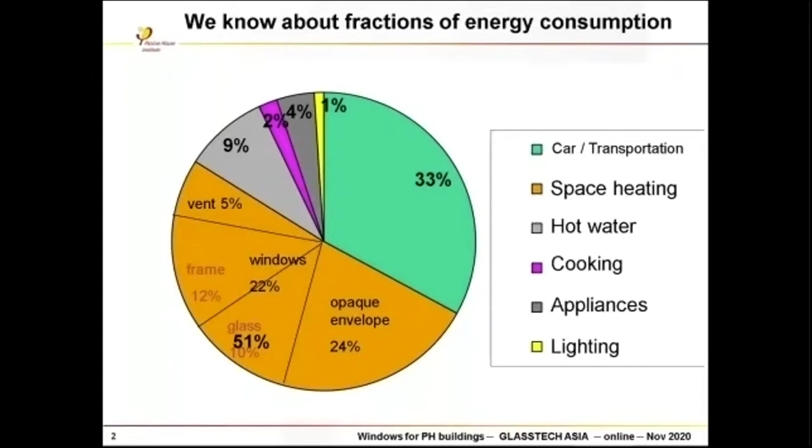As you all know, the fraction of energy consumption of buildings is quite high with respect to other energy consuming sectors in the world. Here the orange part of the circle is about 50%, and windows from the building envelope need about 22% of that. So you see it's very important to go for good performance windows, well insulated with glass and well insulated frames. I would like to go into more detail now.

The other point is about comfort. If you want good thermal comfort inside your building, your opaque parts, but most importantly, transparent parts like windows and glasses, should be well insulated. Therefore we need 3-pane glazing so that the minimum surface temperature at the glass is, in this example, better than about 17 degrees centigrade, even if it's very cold outside.

In old, conventional buildings, this glass and frame insulation is not so good, and therefore you need a radiator just beneath the window.

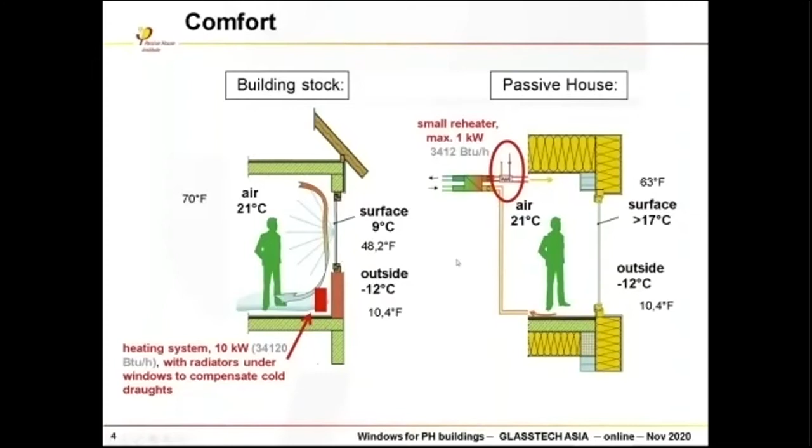If you go into the requirements in detail, for very cold cities with cold winter temperatures, for example Moscow, you have to go down to about 0.6 watt per square meter Kelvin U value. Otherwise thermal comfort will not be good enough for windows.

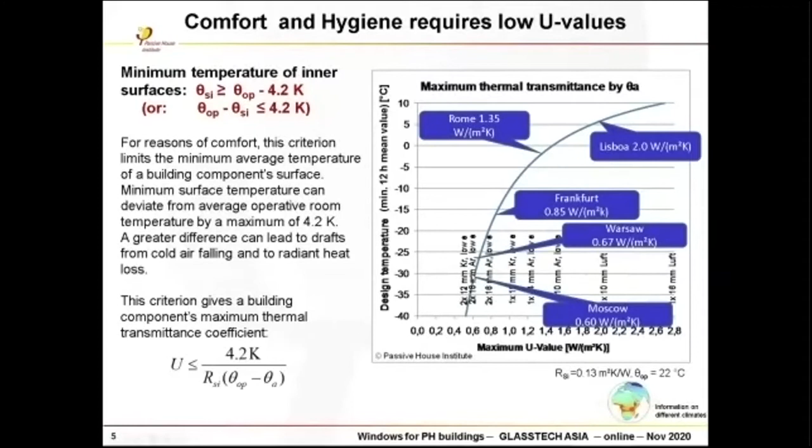The same is true for hygiene. If the surface temperature is too cold, you will probably get condensation inside the glass and frame, and this is not healthy - it may damage and lead to mold growth and so on. Please help avoid it wherever you can.

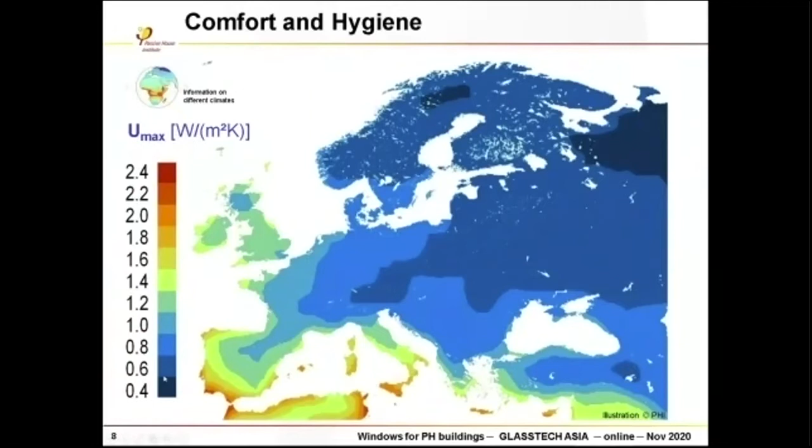From these thoughts you can set up this map, for example for Central Europe and Eastern Europe. You see that the colder the area, the lower the U value you need.

The next point is the gap between glass and frame, the connection at the edge of the glass. Normally a spacer is installed, and if the spacer is not good enough and the glazing rebate is not deep enough, you will have a thermal bridge there, as you can see here.

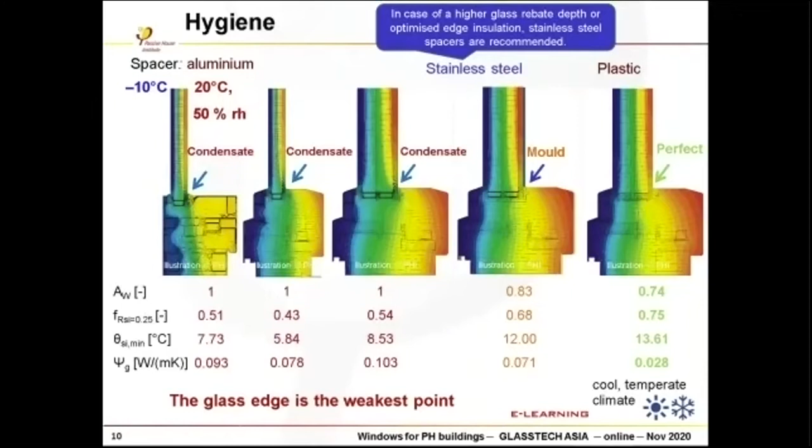If you don't do it well enough, you will have condensate or even mold growth. Only if you go for a very good glazing edge will you get low values and very good performance with respect to hygiene and comfort.

From that you see this map once more. Depending on the winter temperature, you can check the overall window U value you should go for: 0.4 for very cold regions, 0.6 for maybe Sweden, 0.85 for Central Europe, and a bit more relaxed for Spain and so on. In South Italy, you only need a 1.3 U value.

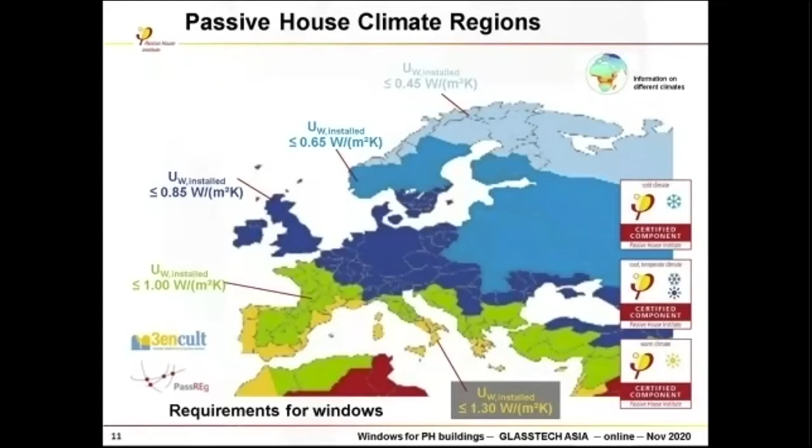This is the goal - to see what quality we should require and where to go. For each region we have now set up a certificate requirement. You see this for the very cold and for the warmer climates, you just get a certificate with different marks here.

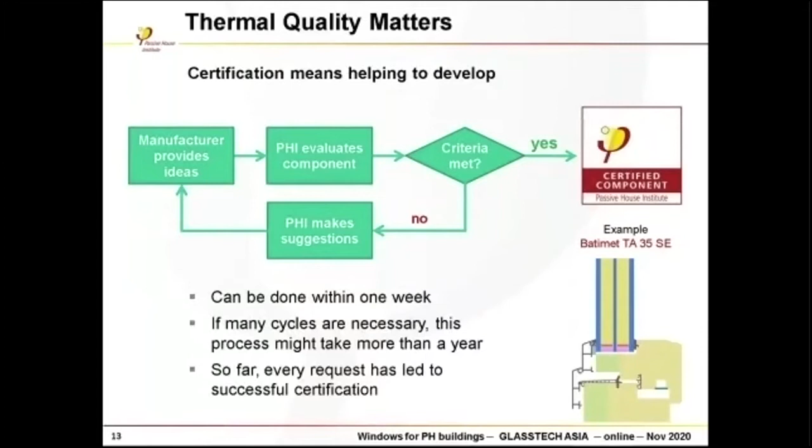What we do with certification, in principle, is quite simple. We check your product, your window, and look if the criteria are met, by looking for the thermal flux through this part. If our criteria are met, we can give a certificate. If not, we make suggestions how to get the window better insulation and lower thermal bridges, and then you can go for the next turn for the certificate.

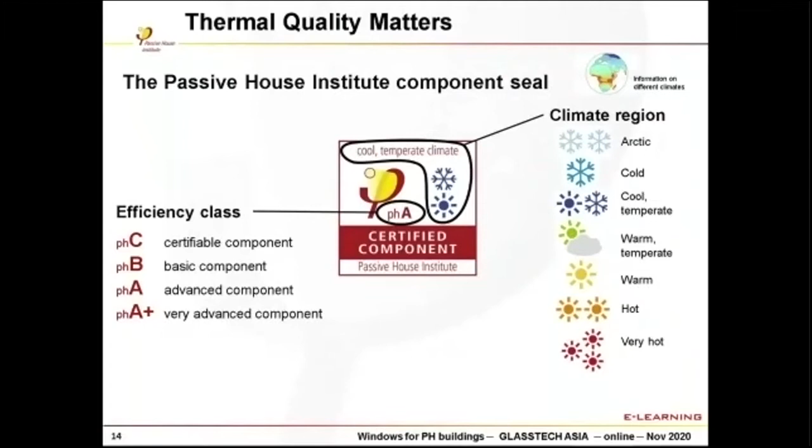Here again you see the certificate. It has three parts: one is the climate, here the other is the efficiency class, and here you see the regions - Arctic, cold, cool temperate, and so on - denominated on the certificate and on the label. On the certificate in total you get more information about the frame, frame quality, and the producer, and what glass you should use for this and that.

So architects and engineers can have a closer look at the quality and make their decision what product to choose. You can find all these certificates on our website, passivehouse.com - please look at the component database link, and there you will find all these products listed.

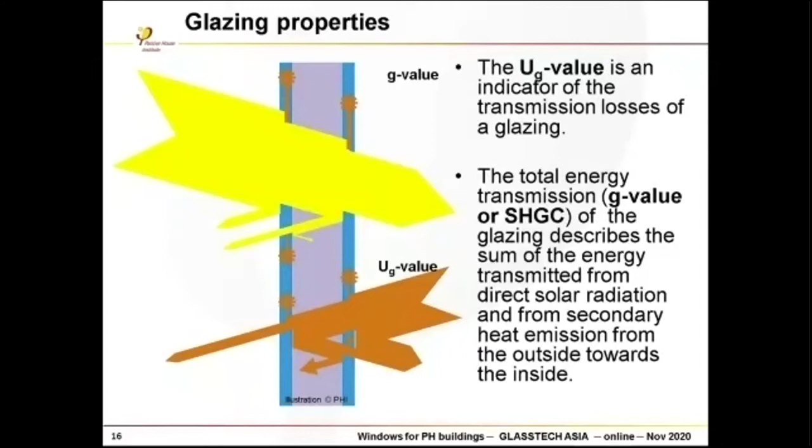Next point is glazing. We get solar radiation from outside through the glazing to the room, and the solar throughput is described by the G value - the higher the G value, the better. Second, in wintertime especially, we have thermal losses, energy going from inside to outside, and the U value describes these thermal losses. So we have to set up a very good ratio: the lowest U value and the highest G value possible, to get a good performance window.

The basic quality is maintained by insulation, having several window panes. A good compromise for most climatic regions is a 3-pane glazing with 2 coatings, on surface number 2 and number 5, with a noble gas filling inside, and a very well designed glazing rebate. For very cold regions you may go for a 4-pane glazing, but this is just for Russia and similar climates.

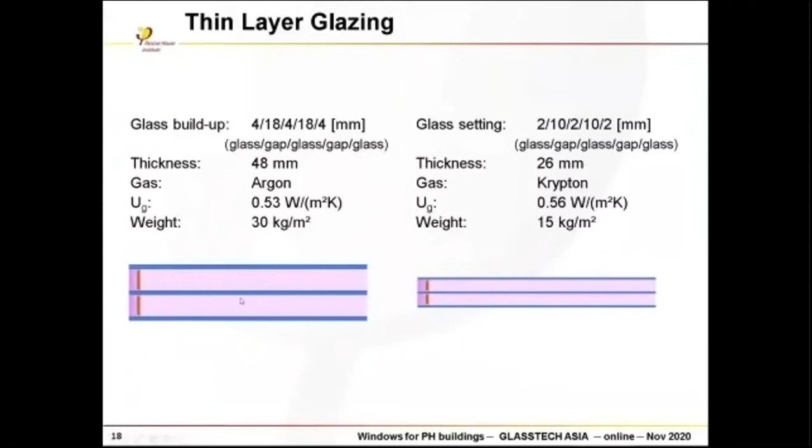Another point: if you want very slim and lightweight glazing, you can do this - it's a newer development. But please note, if you go for very small gaps, you need krypton instead of argon. Argon with a wider gap is a cost-effective solution, but it's a little more weight.

The other point is vacuum glazing. This is a promising development in recent years, but please check the rebate - the edge of the glass has a very large thermal bridge, and therefore, as you see on the right-hand side, you have to have a special frame to get the heat losses at the glass edge as low as possible.

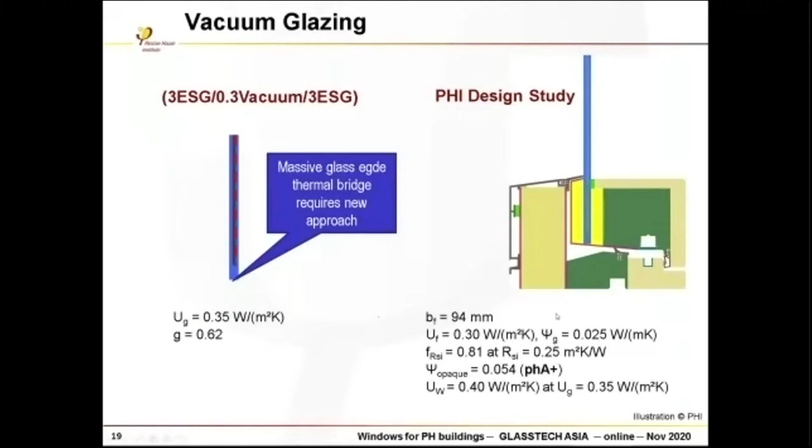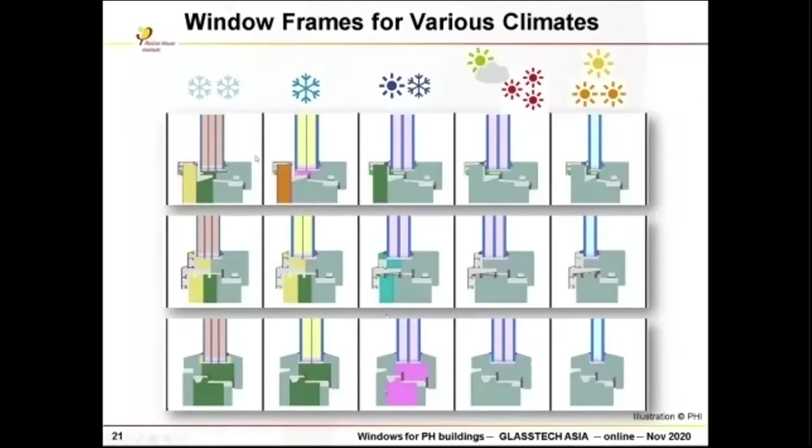If you put this all together, here's an overview of three types of frames. For a very cold climate versus a warmer climate - here you have almost no insulation, only just wood. But for the colder climate, you have to check and go for better insulation, an extra shell, so that your window frame U value is as good as possible.

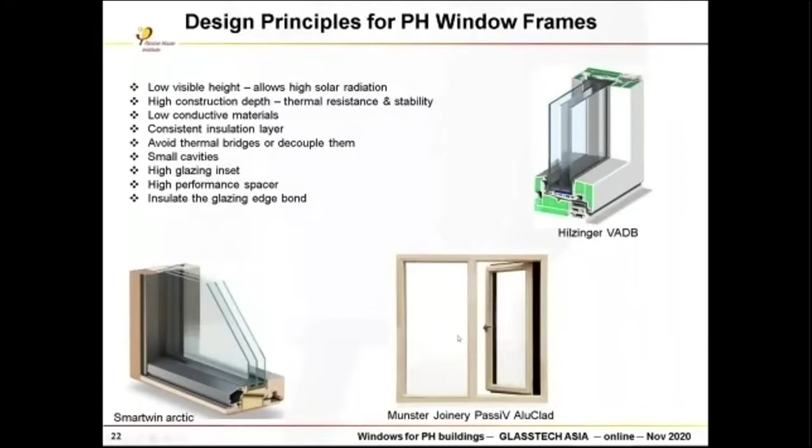As a summary, the two window frames you see here - the most slim width at the side of the window frame is desirable, so that the solar throughput through the window is as good as possible always.

The frame has to be well insulated, and the connection between the sliding frame and the rest of the window has to be quite good here. The manufacturer you can check on the certificate in our component database.

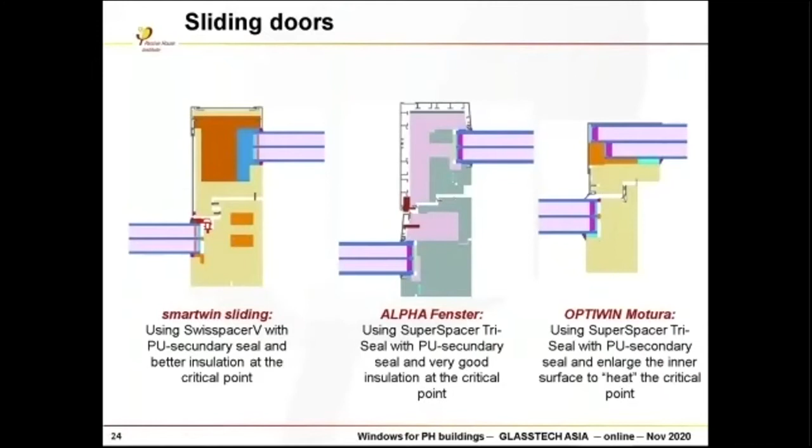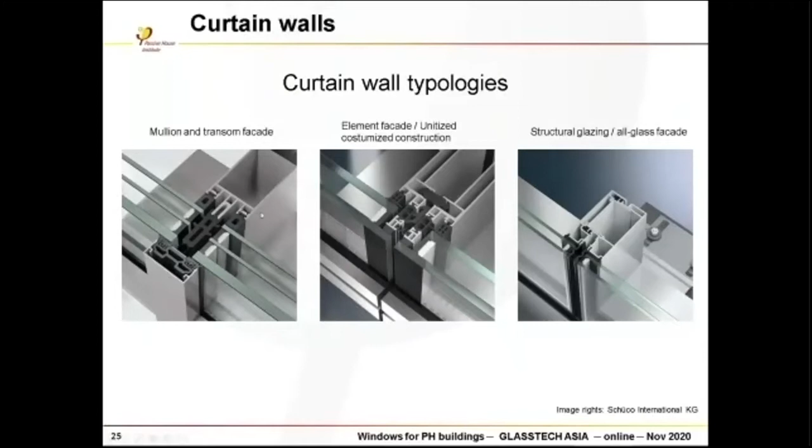For the curtain wall, you have to check in detail what is the fixing, what are the screws and elements, and what is the material of the beams. We check this in detail with your detailed drawings, calculating the thermal flux through all parts of the windows and fixings, and we can set up a model and give advice on how to optimize your window in detail.

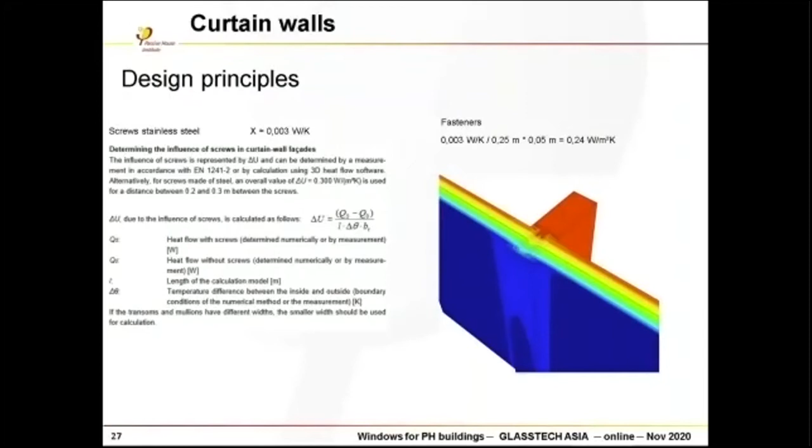Here again, the fasteners are checked. The point is, afterwards you have the psi and chi value of each fixing and each element, so that the curtain walls can be checked in detail.

Here's another example for screws and carriers. There are many things to keep the glass in position, normally done with steel screws. The point now is to use as few steel screws as possible, and make the support with other materials where possible.

If you look at a complete facade, the fraction of heat losses is quite diverse. You see the glass and glaze support, the installation psi value, other fasteners around the glazing, and the mullion and transom. All these things together make up the heat losses of the support, and the glass here accounts for a loss of 73%, so the support and fixing of the glass here is very well optimized.

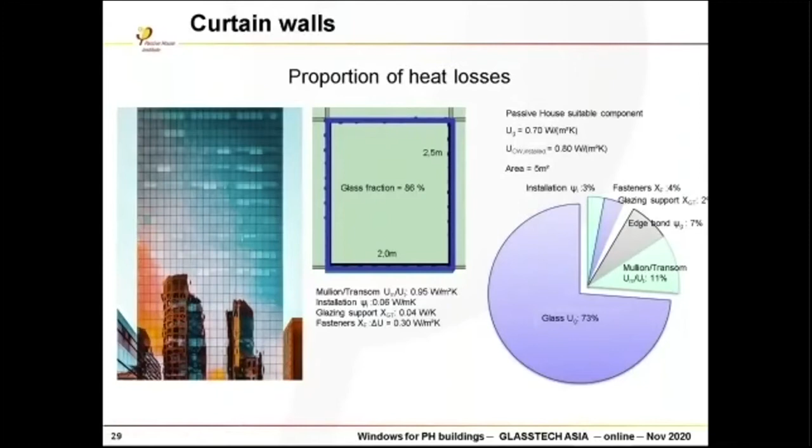But if you don't do this, you will end up, for example, with a glass like this, where the fixing and installation has much higher heat losses. Therefore, this curtain wall construction is not a good idea if you want good performance windows and buildings.

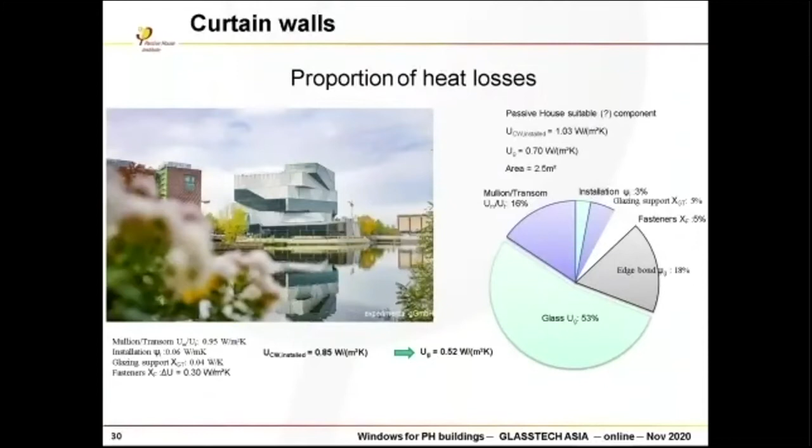Last but not least, the installation of the window is quite important. Here's a simple example: if you install the window on the masonry wall, you will have a very high psi value, so very high heat losses. Only if you install the window within the thermal envelope, in an almost straight line with the thermal insulation layer, can the psi values be as low as possible.

The same is true for boxes for shading elements. You should install the boxes as well as possible with the lowest thermal heat losses. Below, the psi value is 0.07, above it's 0.16, so a factor of 2 is always possible just by optimizing the geometry.

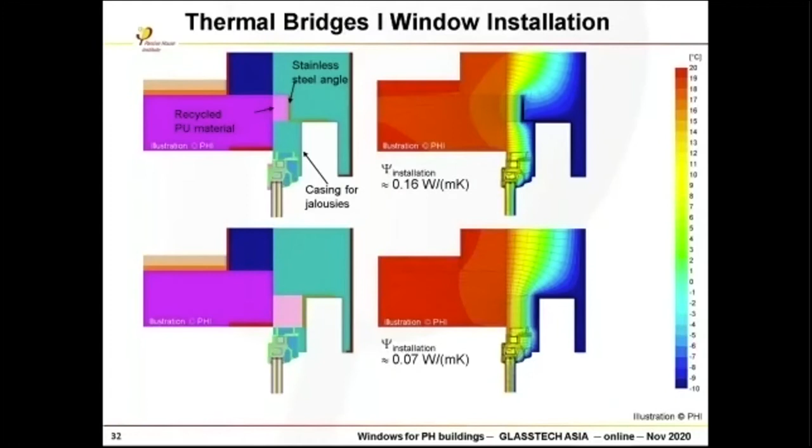Last but not least, we should consider shading, because in summertime and southern climates, you should check that you don't get too much overheating and keep cooling energy as low as possible. The main thing for windows is to keep outside solar radiation outside and not let it in.

One option is to have a lamella in front of the thermal insulating glazing, in front of the 3-pane glazing, and this lamella should be closed as well as possible.

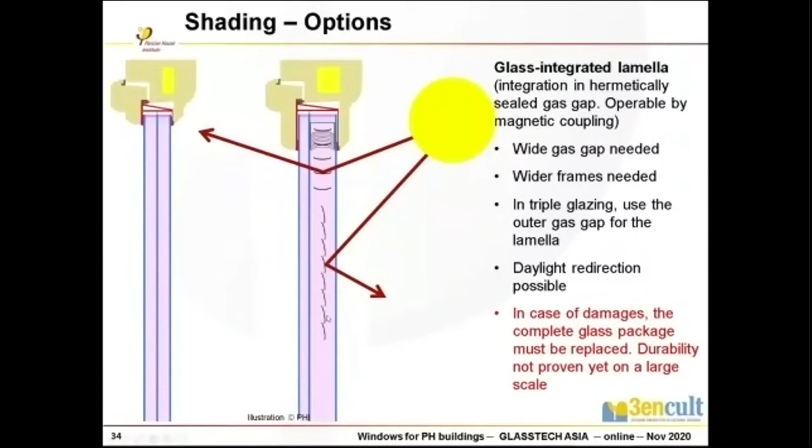Another solution is to have the lamella inside the glass package, inside the 3-pane glazing package, so you can cover it and have everything inside.

By the way, if you have the upper part of the lamella not shaded but open, you can use some daylight instead of artificial light, and this helps save electricity for artificial lighting.

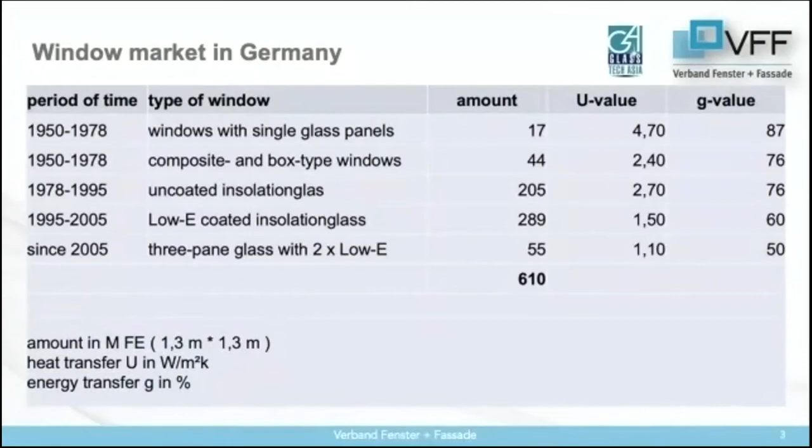The German window market has a volume of 610 million window units. This means more than 1 billion square meters in different qualities and quantities of heat protection and energy transmission. Windows built before 1995 have an economically and technically sensible refurbishment potential, since those constructions don't have any thermal protection layers on the building glass. With 266 million window units, it is possible to save over 14 million tons of CO2 per year.

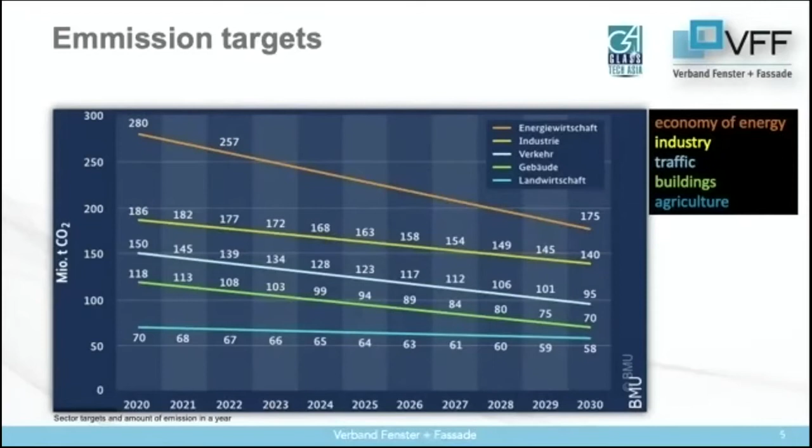Our German emissions targets up to 2030 are defined in sectors: energy industry, transport, agriculture, and buildings. The guideline for the building sector is to reduce greenhouse gas emissions from 118 million tons in 2020 to 70 million tons in 2030. The European Union wants to intensify these targets by about 10 million more tons, to 60 million tons. The current monitoring of the climate protection targets shows that these targets are currently not achievable.

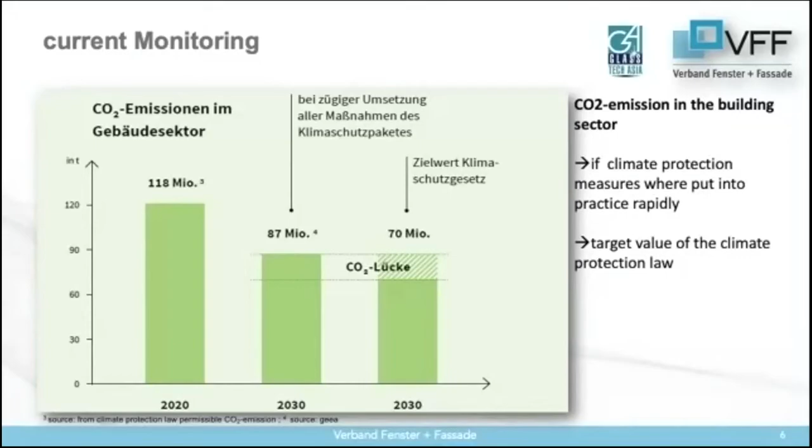There is a gap, and it becomes more significant due to the new European guidelines. The COVID-19 pandemic may currently reduce greenhouse gas emissions in the short term. In Germany, the achievement of targets will be checked annually in the monitoring. After each monitoring, an expert hearing will make suggestions for new climate protection programs to be introduced.

In Germany, we have three instruments for this. First, subsidies through tax relief, financial subsidies, guarantees, and support for research and development. Second, regulatory law on tightening of legal requirements, for example thermal insulation. And last, education and advice — for example, energy consultants show which renovations are useful.

All efforts in new building and renovation aim to use energy efficient windows and facade systems. Good heating, insulation frame and glass constructions, the use of solar gains, sun protection and automation are important and correct investments in buildings for climate protection. The building envelope needs to get better in the future, and the principle 'efficiency first' is politically supported.

We are looking for solutions to questions of product life cycles and grey energy. It is important that new windows and facades are also manufactured sustainably. Therefore, we have very successful solutions for the plastics and aluminium window sectors.

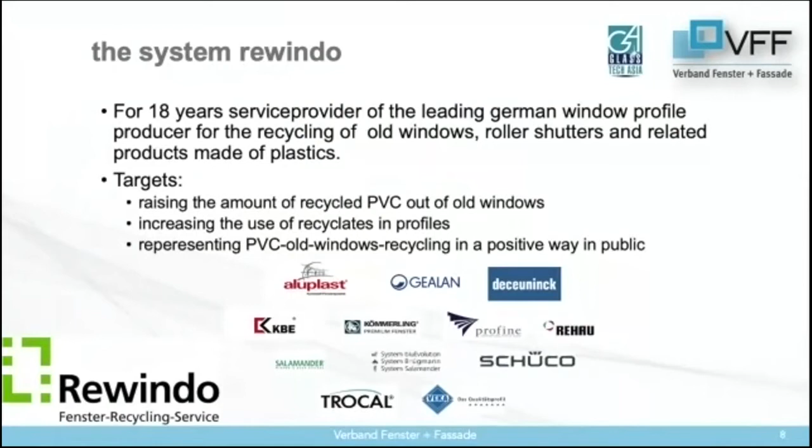The Rewindo system, for example, has recycled plastic products from windows and roller shutter profiles very successfully for more than 18 years. All German systems providers are involved in this process. The targets are: first, constantly increase the proportion of plastic made from recycled old profiles; second, while doing so, increase the proportion of recycled material in new profiles; and last, create a positive image for the product plastic.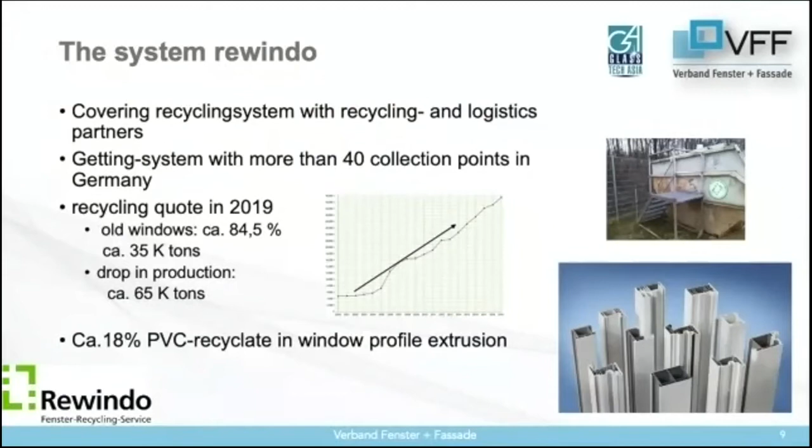The current success is shown in the following slide. The system covers almost all of Germany. There's a good logistical concept so that old profiles and production waste can be picked up directly from the processor or from the construction site. The recycling rates we currently show in the slide improve from year to year. With the current proportion of 18% recycled material in new profiles, there is still significant potential for a higher proportion.

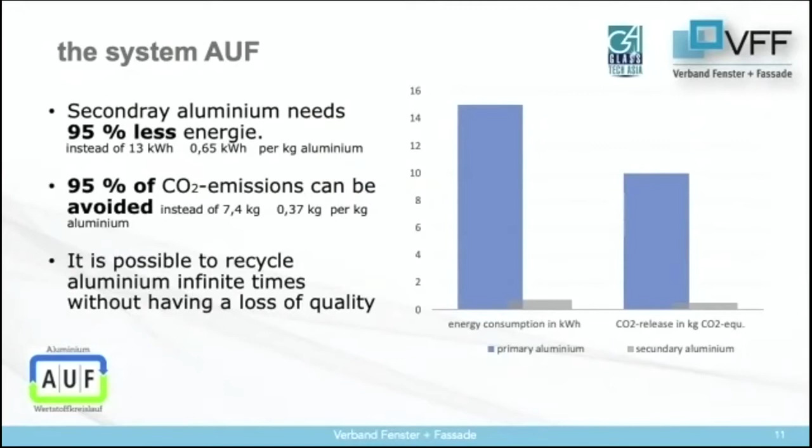Furthermore, the system AUF is very successful in aluminium window constructions. The recycling rate of old aluminium profiles is about 98%. Secondary aluminium will be completely melted down into new profiles available to German window and facade manufacturers. AUF recycling makes a significant contribution to climate protection — both energy consumption and CO2 pollution are reduced by about 95%. In addition, there's no loss of quality within this process, and the cycle of producing secondary aluminium from old profiles can be repeated as often as required.

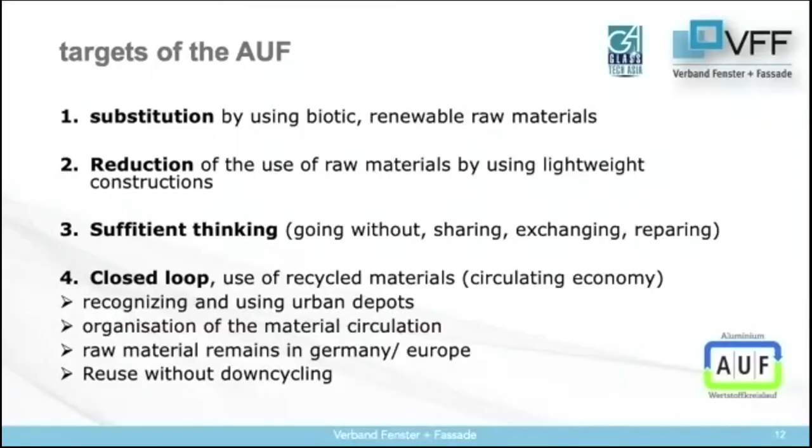The primary target of the AUF system is to organize a closed loop, with no downcycling. Second, perfect logistics for collecting and transporting old dismantled aluminium and bringing it back into the secondary process. And last, reduce transports and keep the materials in our own country.

Currently, scenarios show that in maybe 30 years there will be no more quartz sand available for new glass production. Furthermore, old building glass that has been removed is not being recycled. Mostly it is split into the substructure of buildings or new streets.

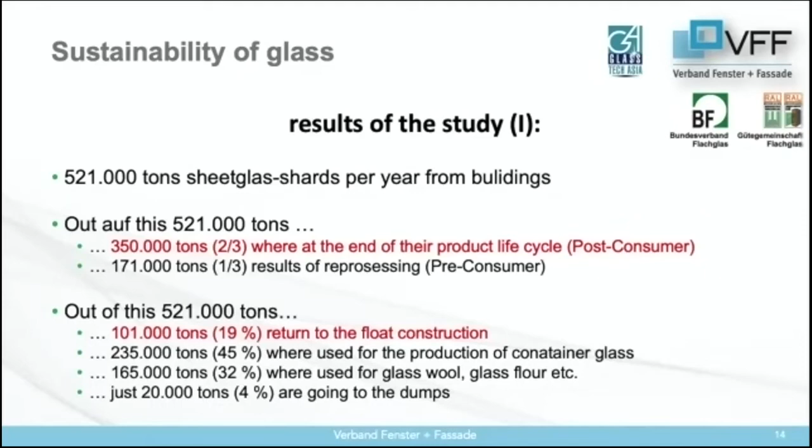A current study of the German Flat Glass Association, short BF, shows a possible volume of 521,000 tons, two-thirds from the dismantling of old window constructions and one-third from production waste.

Overall, the direct recycling rate of 19% in the new float production process is still too low. Viewed differently, even less waste glass from dismantling goes back into the product cycle. The downcycling rate is very high, at 77%.

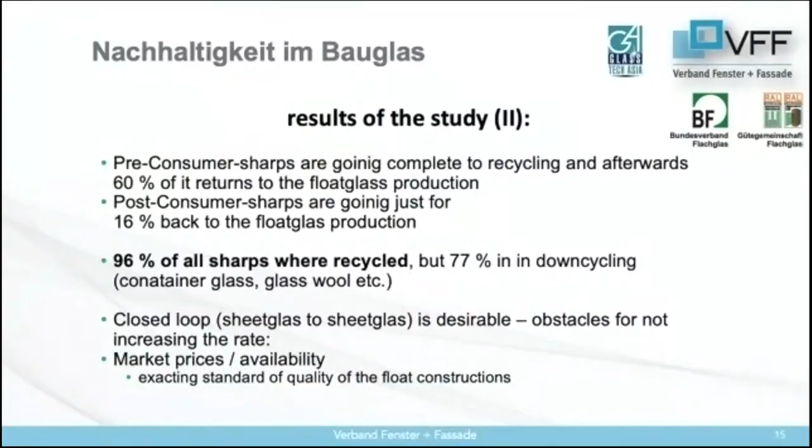Considerable efforts are still required to achieve a closed loop in the glass industry. It is currently technically and economically difficult to increase the recycling rate, because of the high technical requirements placed on glass: it has to have good colors, it has to have planarity, and incorrect inclusions should not be there.

Sustainability is getting more important socially and politically. Questions about grey energy, product life cycle, cradle to cradle, and closed loop are becoming more important. Sustainability is a general obligation for the future.

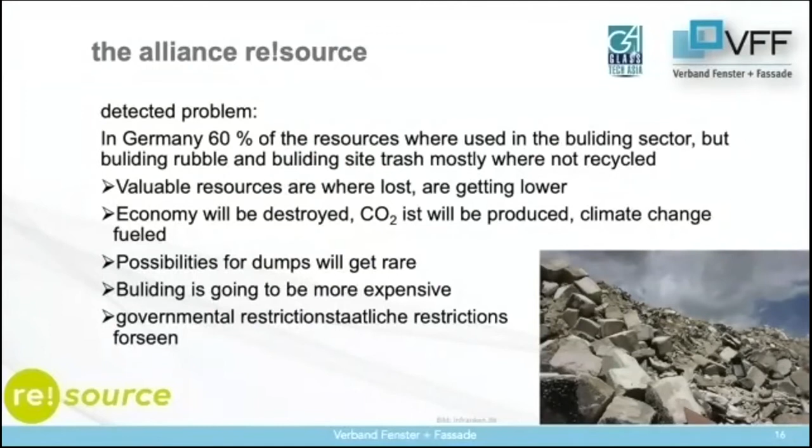Therefore, the alliance re!source was founded in Germany two years ago. The German construction market needs almost 60% of the resources. Therefore, questions about waste, resource conservation, CO2 balance during the product life cycle, construction costs, and regulatory laws must be considered as a whole.

Furthermore, the Allianz links different fields: politics, business, society, science, and the public sector. The Allianz wants to develop new ideas, promote the exchange of science, and last but not least, wants to give inputs into the political process.

Specific approaches that are already being implemented are listed here as examples. The main focus is, first, incentive systems and funding programs for sustainable buildings. Second, research projects that show that the orderly demolition and separation of raw materials is possible. Third, that sustainability is also economically viable. And last but not least, we want to show lighthouse projects or pilot projects, which must be implemented in public buildings first.

Thank you for your attention. We only have one Earth, don't waste it.

Well, many thanks, Mr. Lange, for these details you just shared with us. This is truly interesting, and not only the numbers, but also the link you made to social aspects and political aspects. Thank you very much.

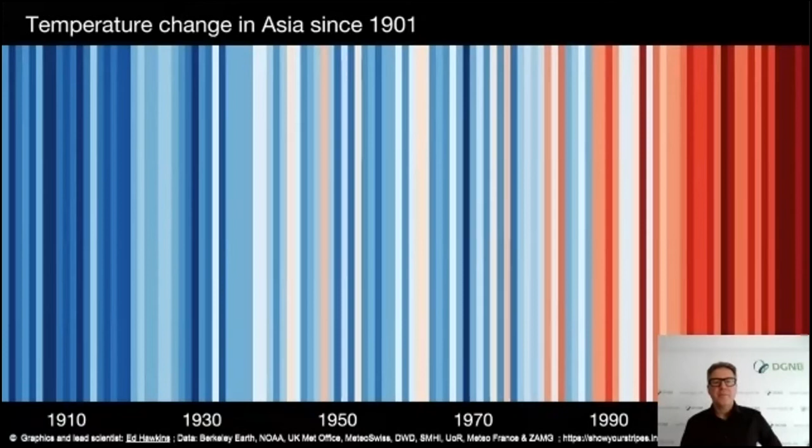But not only temperature is changing, also the world is changing. Changes you can see everywhere. We see growth of population and urbanization. We see a demographic change. We see regional shortage of clean water, climate change, as mentioned. We see scarcity of resources essential for economic prosperity. We see increasing pollution of air and water, and this is caused by industry and traffic. All these changes have an effect on our life and on our societies.

And what we need is a concept to bring all these needs and threats together in one assessment scheme. The United Nations have developed such a concept: a concept of sustainable development goals.

Buildings and cities and good health are basic needs for each society. In parallel, climate action is the most important global urgency. With the Sustainable Development Goals 11, Sustainable Cities and Communities, 3, Good Health and Well-being, and 13, Climate Action, these basic needs are represented.

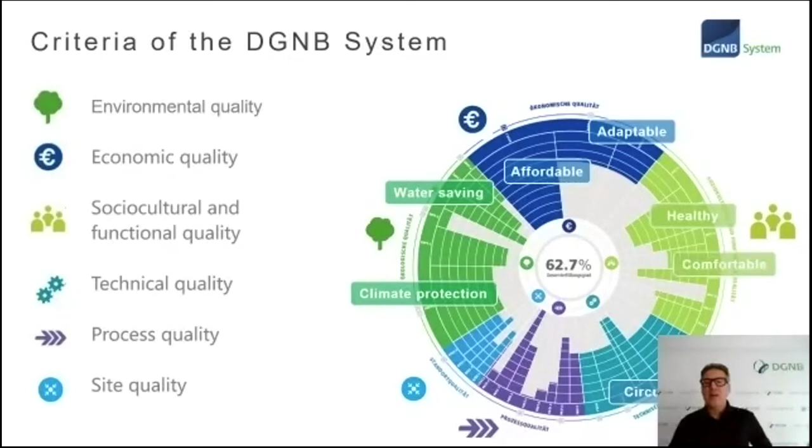So what are key words within the system? You can find criteria addressing affordability of the building, so an economic criteria, and adaptability. So if the building is flexible and you can adapt it to different use over the lifetime, it is a more valuable building. Of course, the environmental aspects like water saving and climate protection are core of the system, beside circularity. But for the people, it's on the same level of importance that it's a healthy building and it's a comfortable building.

But why do you need certification for that? The DGNB scheme is a life cycle planning and optimization instrument. Therefore, it creates a cost reduction. It has a strong focus on processes to avoid costly risk. So it's an instrument for risk mitigation.

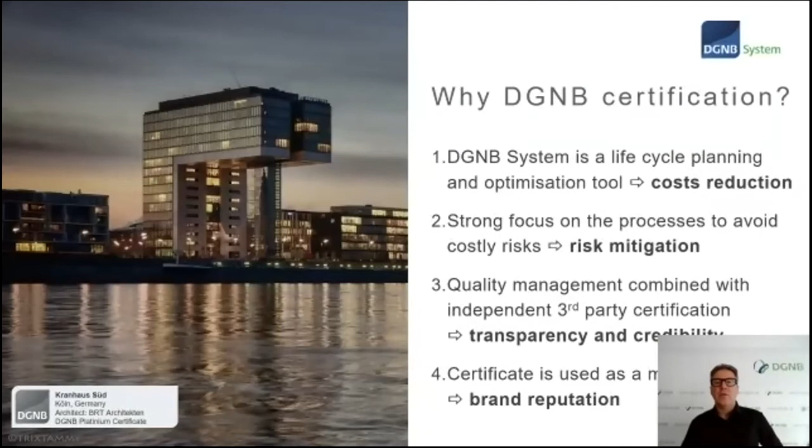Quality management combined with independent third-party certification is providing transparency and credibility. And the certificate is used as a marketing instrument. So it helps for brand reputation. So these are all aspects which are important, why certification is an important instrument to support sustainable buildings.

On top of that, we have created the Climate Positive Award for extraordinary buildings, buildings which are meeting already today future requirements on the climate side. So a climate positive building is a building which is mitigating climate change more than it is contributing to climate change. So typically these are energy positive buildings harvesting more energy than they need during operation in a 50-year lifespan.

There are also international examples for the Climate Positive Award. The School of Design and Environment in Singapore is one of these examples. Of course, in Singapore, heating is not the issue, it's cooling and ventilation. In Germany, the Active Stadthaus in the Speicherstraße in Frankfurt was one of the first climate positive buildings. It's an apartment building. It's high density, and there you can see PV panels on the roof and in the house facade.

The City Hall in Freiburg is an office building with the same characteristics. There you can see also PV in the facade, and this is one of the future options I see in many buildings.

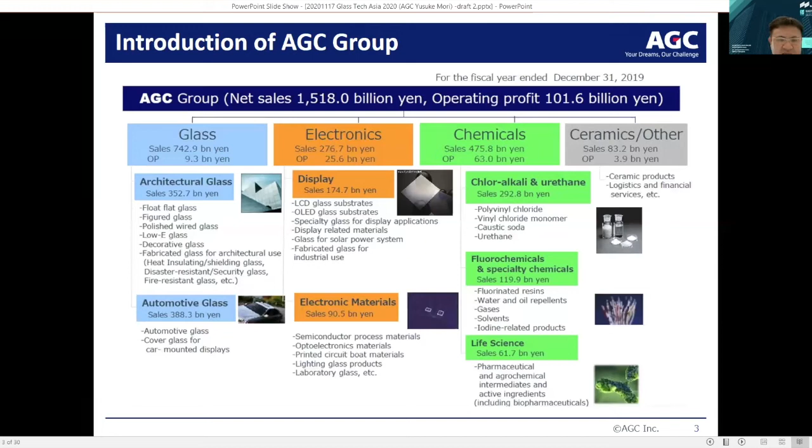In 2013, AGC Asia Pacific, AAP, was established as a regional headquarters of AGC Group in Singapore. The regional headquarters manage market analysis and sales of group products, aiming to contribute to the regional society with advanced products and services related to people's lives, environment, imaging, communication, and energy.

In 2017, AAP became one of the founding partners of the World Green Building Council Asia Pacific Regional Network, with environmental sustainability being an integral part of the company values. AAP has since collaborated with the Green Building Council network to help realize the positive benefits of green building.

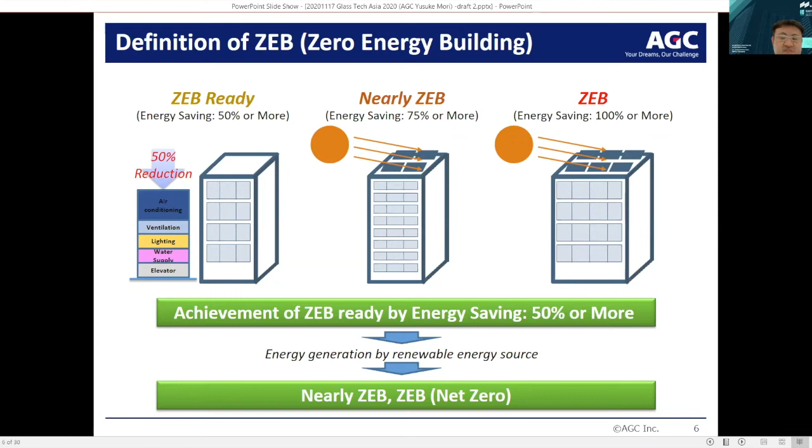For ZEB Ready, nearly ZEB, and ZEB, products and solutions for energy efficiency and energy generation are required, as shown in this slide. For energy efficiency, the important points are composed of 3 points. First is load reduction, which is improvement of thermal insulation and solar shielding. Second is use of natural energy, expected from renewable energy. Third is use of improved equipment and systems. And for energy generation, introduction of renewable energy is needed.

Based on the global status report for building and construction, globally the building and construction sector accounts for 36% of final energy use and 39% of energy and process-related carbon dioxide emissions. So green buildings are becoming the new normal worldwide, especially in today's commercial construction and high-rise residential buildings.

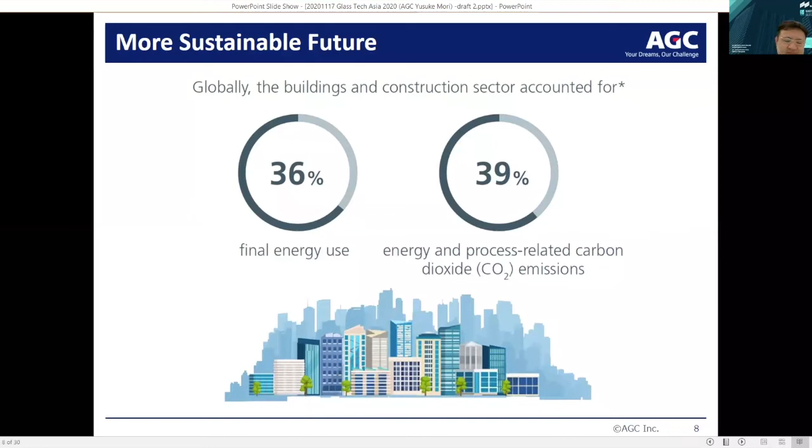For a better future, AGC Group can offer the following 5 key value propositions. In this presentation, I'd like to focus on the products which contribute to energy efficiency and energy generation.

The first one is a wide range of energy saving innovation. Energy saving glass products include magnetron coating and chemical vapor deposition for facade application, with a low solar factor and excellent thermal insulation. This is the first one.

The second one is the on-site energy generation solution. Energy generation products include building integrated photovoltaics BIPV glass for external use, and this energy generating solution allows buildings to harness the power of solar energy through our architectural glass.

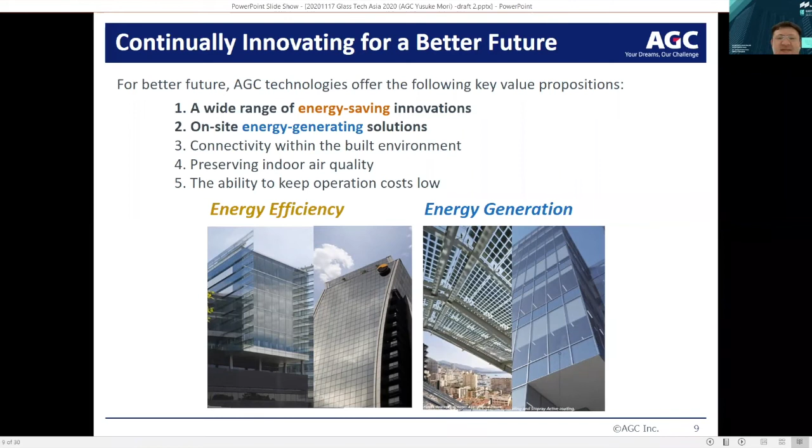This slide shows each product's SHGC, which means solar heat gain coefficient value, compared with VLT, visible light transmittance. As you can see, we have a wide range of SHGC products for the various requests from customers.

In the range of SHGC 0.35 to 0.6 is the solar control low-e glass by pyrolytic online coating. In the same range, this big square is solar control reflective glass by pyrolytic online coating. On the other hand, in the range from SHGC 0.2 to 0.35 is solar control reflective glass, this small square here, and low-e double glazed units by sputtering coating, soft coating.

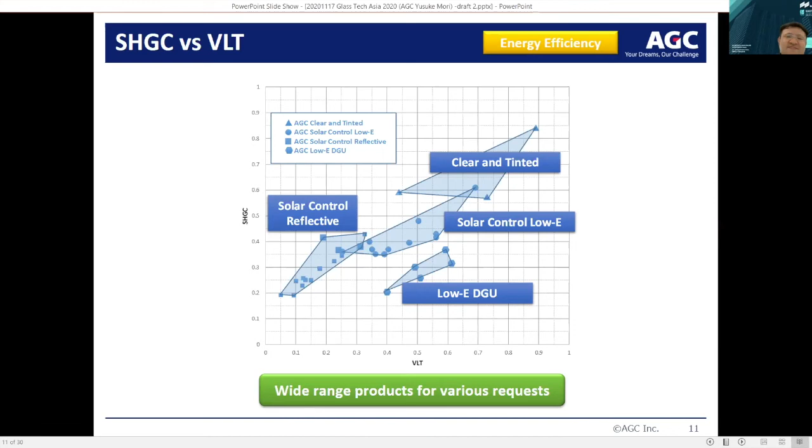So the next slide is the solar control low-E glass. The first one I want to explain is on the left side: Sunergy. Sunergy is a pyrolytic coated glass, highly scratch resistant, and can be bent, tempered, and laminated. Together with its excellent solar control properties and low reflection and neutral appearance, Sunergy is definitely an ideal product in today's architectural world. On the other hand, the right side is Stopray.

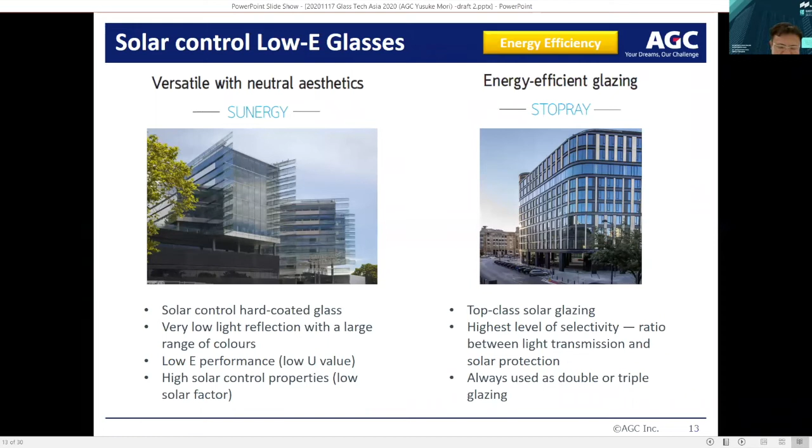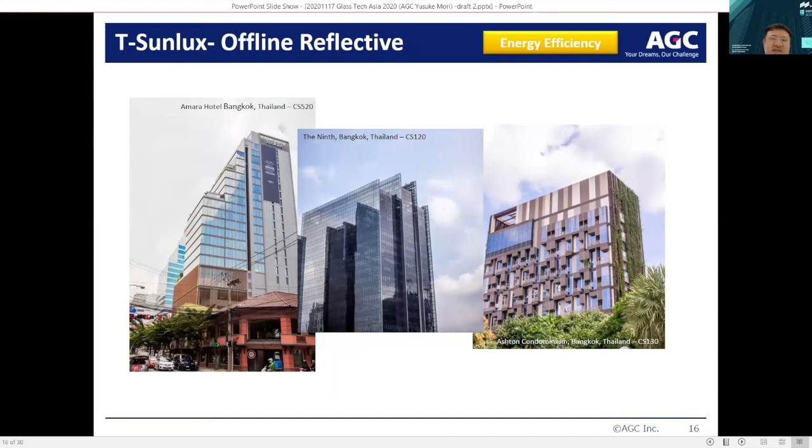This one is the T-Sunlux, the offline reflective as I explained. This one is only focused on the Thailand project reference. And the fourth one is Stopray, also in the Thailand project reference. I've picked up four project references in Thailand.

Next, we can show you the result of the OTTV calculation. OTTV means Overall Thermal Transfer Value, based on the BEC, Building Energy Efficiency Code in Thailand. The case study glazing types are clear float glass, T-Sunlux CS520 coated on blue glass, and Stopray Vision 40/40T, where T means temperable. This is, as I explained, an offline low DGU structure.

This calculated OTTV is for an office case: clear glass is 115, coated glass is 46 and 32. For group 2, the department store case, clear glass OTTV is around 87, coated glass is 37 and 25. Group 3 is hotel, hospital, condominium: clear glass is 54, coated glass is 23 and 15.

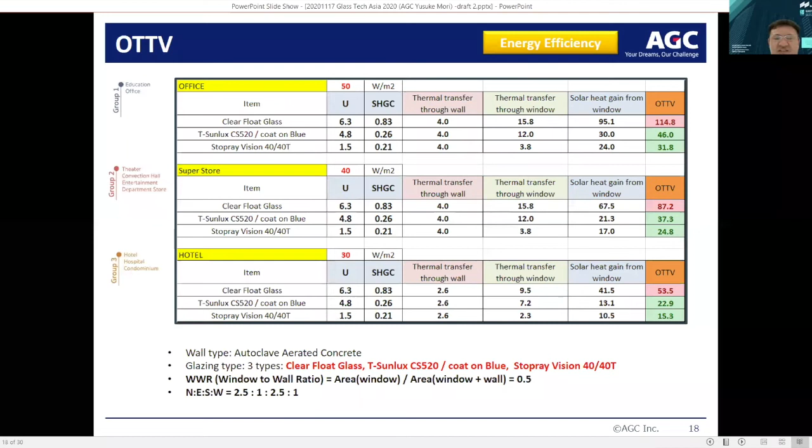Next, based on each OTTV calculation, annual operating electricity can be calculated, as you can see in this slide. From OTTV to building OTTV, then building cooling load, which you need to change into refrigerating tons, then annual operating electricity in kilowatt hours, and then in Thai baht and USD.

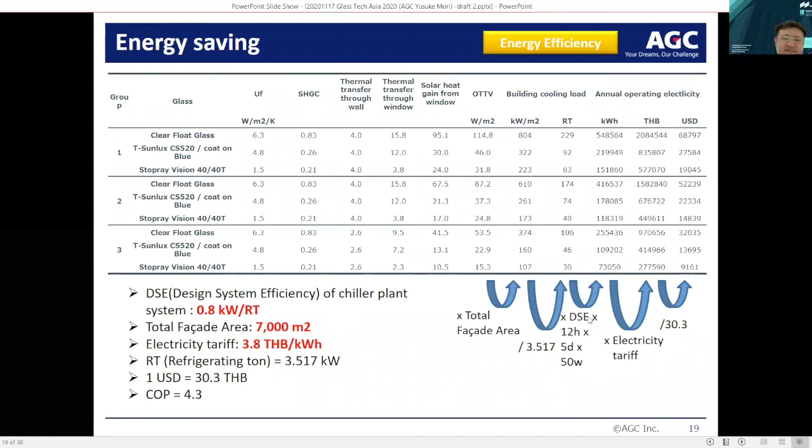Based on the result of our OTTV rough calculation, compared with clear glass: T-Sunlux and Stopray Vision type show, first for T-Sunlux, around 57 to 60% decrease compared with clear glass, as you can see in this slide for group 1, group 2, group 3. And Stopray Vision type shows more decrease, around 71% and 72% energy saving.

Next, I'd like to introduce BIPV, Building Integrated Photovoltaic glass. This is a building material that is also a shading device providing thermal comfort, allowing for natural daylighting and also sound insulation. It is also a source of renewable energy, as you can see in this slide.

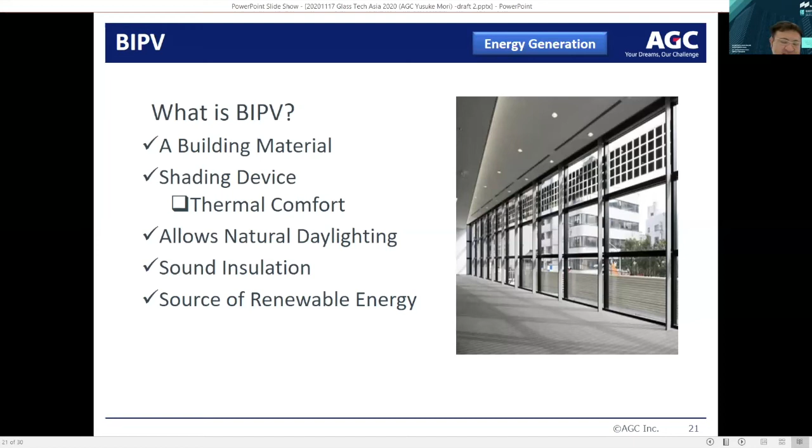So BIPV is a custom-made module with multiple design possibilities. Because the PV material is sandwiched between two pieces of glass, this is suitable for use in building facades, unlike conventional solar panels made from glass and film. The module structure is typically laminated glass, which makes it a safety glass.

There's a gap between the cells that allows natural daylighting to pass through. This way, we can reduce solar heat gain and provide supplementary electricity.

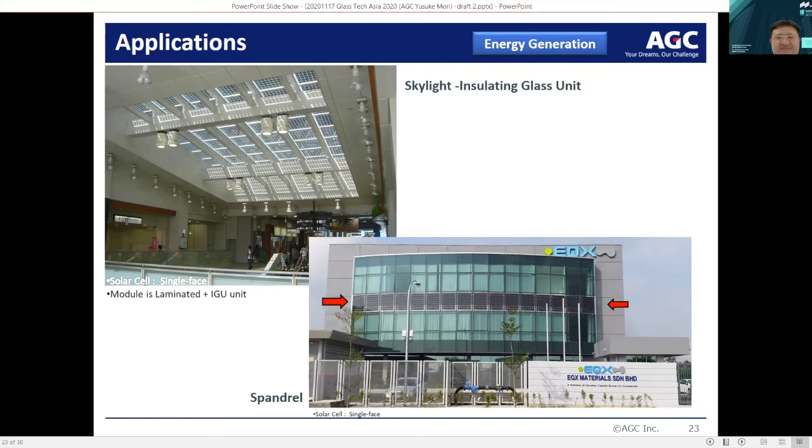This is also our project reference, a facade curtain wall application in a building in Yokohama, Japan. This project was installed in 2008, and to this day it is still generating a fair amount of solar energy for the building.

The spandrel area, the top of vision light, and the light of the facade are ideal for BIPV. The cell can also provide shading and help reduce energy loading in the building.

Recently, this slide shows another type of solar cell. We are also able to develop the module in different color cells. Currently there's a transparent type of module with Sphelar cells, called 'sudare' in Japanese - a blind type of cell.

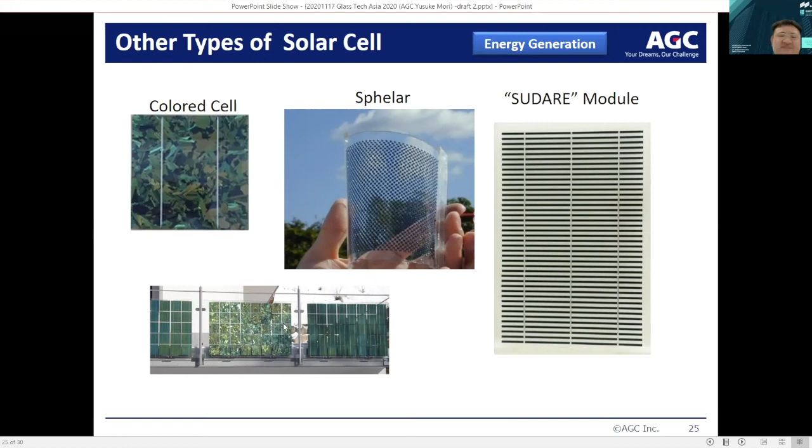Recently, we also developed a new type of BIPV - the BIPV active type. This is an opaque energy generating glass solution for spandrel and cladding applications. The benefit is no negative impact on design, flexibility in design, and a smooth, uniform appearance.

Finally, today I've introduced two types of our products: for energy efficiency and load reduction, various types of eco glass facade products named Stopsol, Sunergy, StopRay, and T-Sunlux; and for energy generation, building integrated photovoltaics, BIPV, under the brand name Sun-E Watt. By using these products, we would like to contribute to green building, low carbon building, and smart city. Thank you very much for your attention.

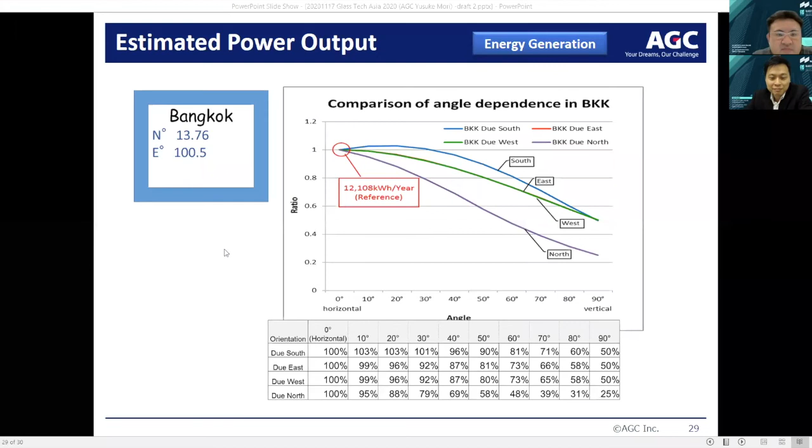Okay, great, thank you for sharing this data. This is very precious data that Dr. Mori is sharing with us. We hope you have taken the chance to look at this data. Thank you, Dr. Mori, for the explanation.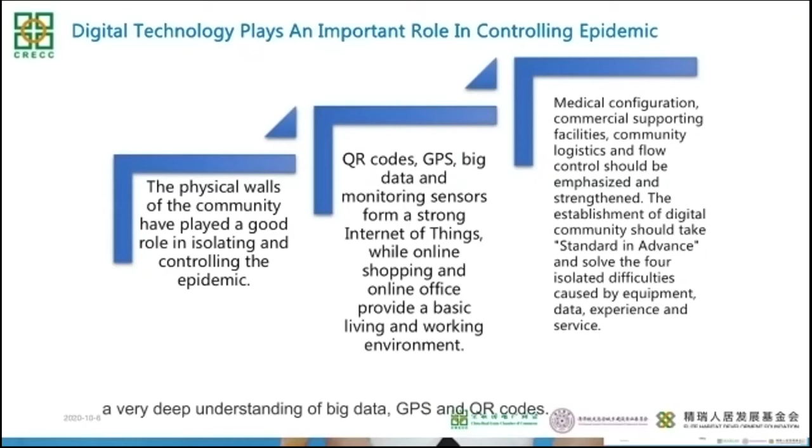The second way digitization aids in control is that we have a variety of QR codes which play a huge role in health, GPS tracking, collating big data, and monitoring. We have a very deep understanding of big data, GPS, and QR codes, which makes tracking trends much easier. Technology plays a huge part in our lives.

If you don't know how to operate a smartphone, for example, you can't go home, visit the doctor, get on a plane, get out of the airport, or leave the railway station. This is part of the reason our lives have not been affected too much during the closure for COVID-19.

This can be attributed to 4 things. Firstly, online shopping plays a huge role in our lives. Secondly, teleconferencing on the internet allows us to continue face-to-face meetings and conducting business even though offices may be closed. Thirdly, the success of our battle against the epidemic could not have been achieved without China's internet and our universal use of WeChat and online payment.

Finally, the medical industry itself has been upgraded, and the national allocation of medical resources, commercial support, and logistics control have all been enhanced. We can see that digital technology has played a huge role in epidemic control and community management, which is seen by the whole world.

We have shown that at this time, China can control the epidemic very well, but even so, we face tough challenges and competition. Other countries are also developing the internet, and everyone has started to recognize the scale of the problem. Beginning in 2020, the global digital economy will upgrade from consumer internet to industrial internet. Now is the time to turn the corner.